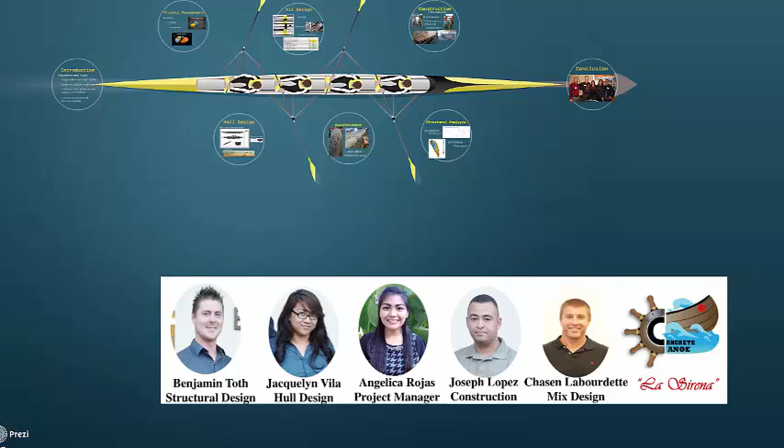Hello, my name is Angelica Rojas, and I was in charge of the project management for the concrete canoe team. Hello, my name is Jacquelyn Vila, and I was in charge of hull design. Hi, my name is Chasen Labourdette, and I'm in charge of the mix design of the concrete canoe. I'm Benjamin Toth, and I was responsible for structural analysis. Hi, I'm Joseph Lopez, and I was in charge of construction.

Our objectives and goals for this project include designing a hull that maximizes speed and stability, creating a mix design that is strong as well as lightweight. We have also taken on the challenge of designing the thinnest concrete canoe in San Diego State history, with a sidewall thickness of 0.2 inches. We are determined to crush our competition in the Pacific Southwest and compete in nationals. And now I would like to introduce Angelica, who will discuss the aspects of project management.

As a project manager, I was in charge of creating a schedule and setting strict deadlines. I monitored and oversaw each division to make sure everyone remained on track. I also organized weekly meetings where each member of the team gave an update of their progress and where we addressed how to overcome any conflicts that we encountered.

Another of my tasks was to contact companies and coordinate meetings with professional advisors who offered the team their guidance and support. I also contacted suppliers for sponsorship and discounts, which allowed us to reduce the cost of the project significantly. Another thing I was in charge of was ensuring access to labs and machines so that the team was able to perform necessary analysis that aided in the final design of a canoe that will perform exceptionally in the competition.

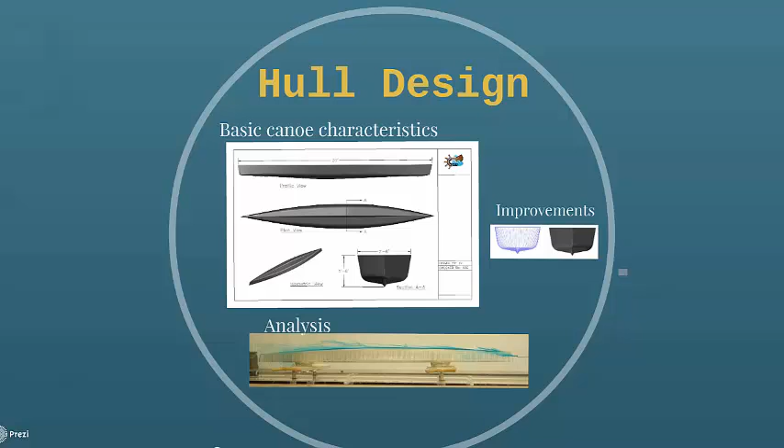A lot of research was done to determine the most optimal hull design for a concrete canoe. As a team, we focused on basic characteristics necessary for La Sirena to perform well during the race portion of the competition. The races require canoes to travel at high velocities in a straight path and be maneuverable. In watching the performance of canoes in past competitions, there were many areas that needed improvement.

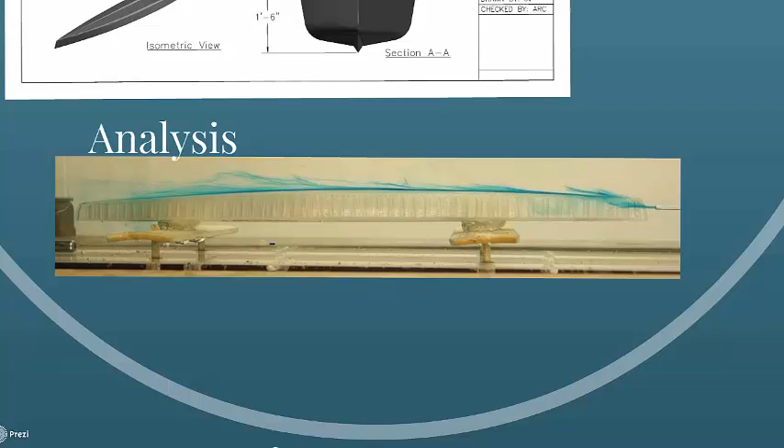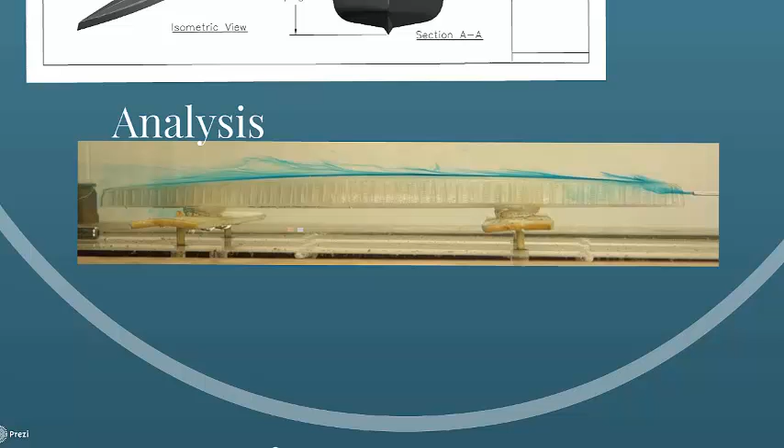Some canoes had a high rocker, which prevented an intended sharp entry line to break through the water surface and created difficulty in steering. For our analysis, we used a hydraulic channel to determine how various hull designs affect the flow. We 3D printed scaled models varying in lengths and widths, and a model consisting of a keel. Last year's hull was used as control. This analysis would give insight on the turbulent or laminar properties each hull would offer.

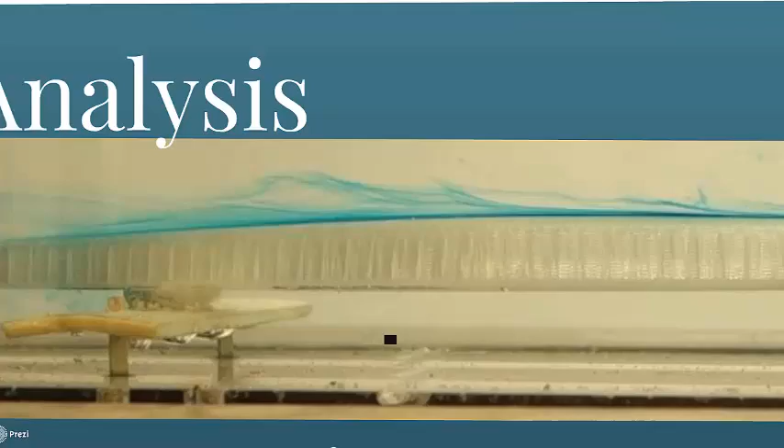For example, the wider model performed with low turbulence and created more of a laminar flow, whereas the more narrow model created more turbulence. From this observation, a wider model would be best. La Sirena is a foot shorter than El Luchador at 20 feet. A shorter hull will help with turns, and a keel was added to create a more streamlined flow and allow the paddlers to focus more on speed than on steering.

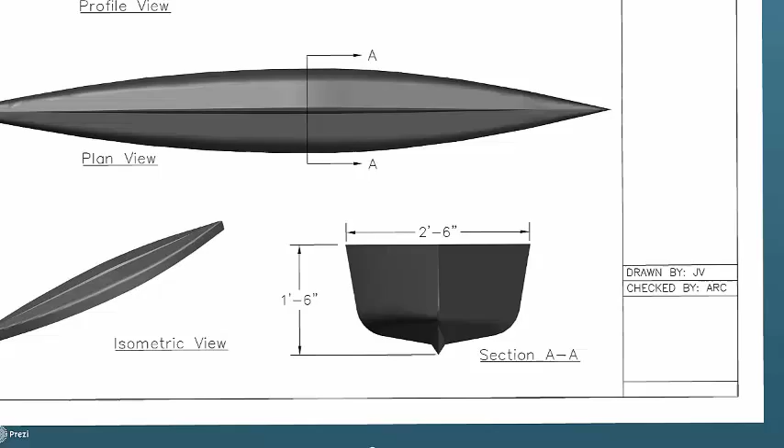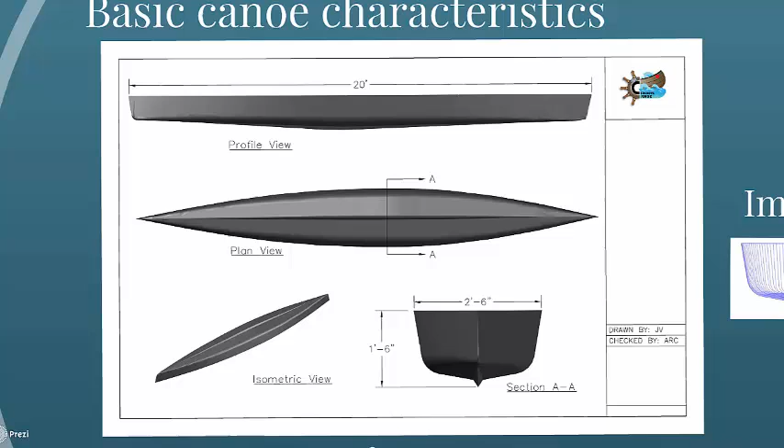The shallow V profile will aid in maneuverability and resist tipping. The widest point of the canoe of 30 inches is located a foot from the center to create a sharp entry line, and with a moderate rocker, create a lower bow height, improving the issue past canoes had of having too high of a rocker. And now Chasen, our expert in mix design.

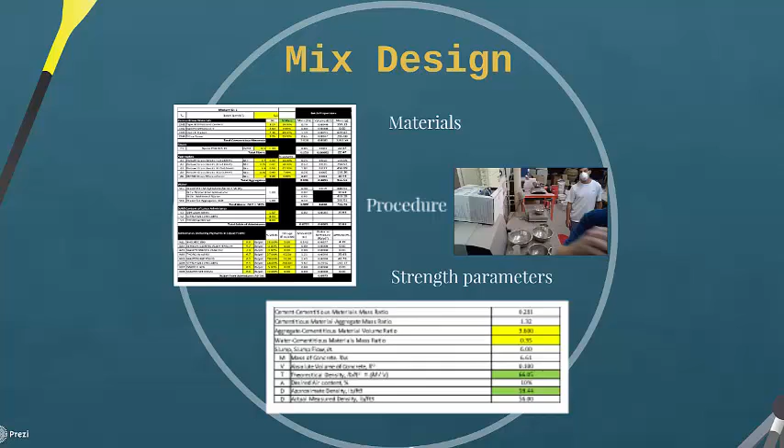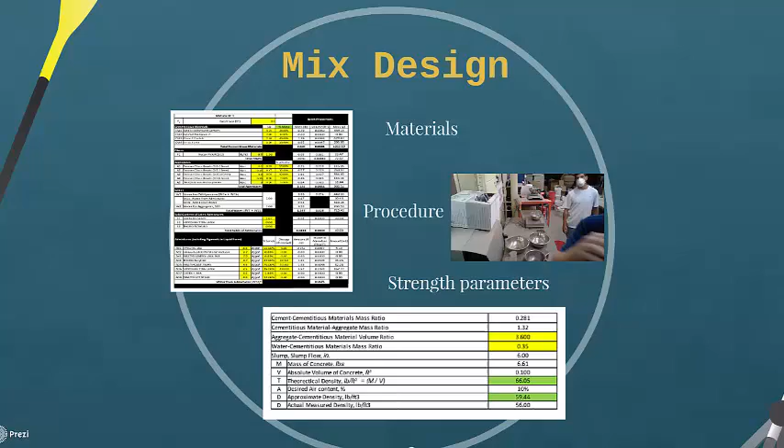The goal this year was not to redefine last year's concrete mix design, but refine all research, testing, and techniques of previous years. Cementitious materials used were Type 2/5 Portland cement, Class F fly ash, and silica fume. We chose to add more Class F fly ash than cement in order to increase compression strength and decrease permeability. Fibers used were PVA glass fibers, intended to increase tensile strength and reduce cracking.

Aggregates used were expanded glass beads ranging from 0.1 millimeters to 2 millimeters, and K20 glass microspheres used as a fine aggregate.

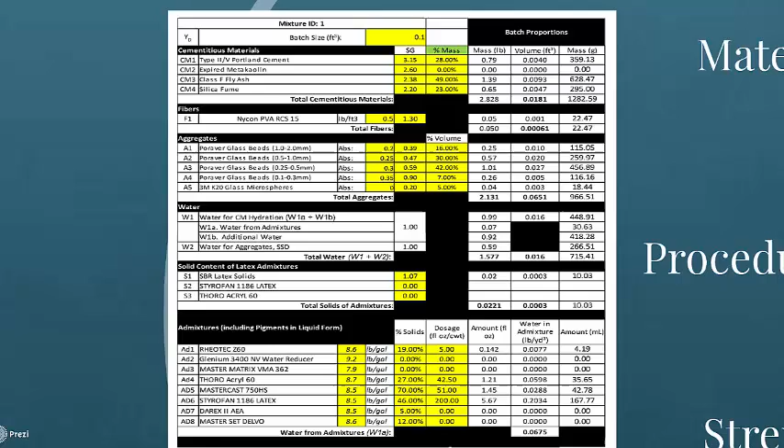Liquid admixtures included Rheotec Z60 for a workability retainer, Acryl 60 for bonding and modifying admixture, Mastercast 750 as a plasticizing admixture, Styrofan latex as a water reducer and polymer modifying admixture, Darex II for air entraining, and Masterset Delvo for hydration control admixture. The following video is an example of our mix procedures.

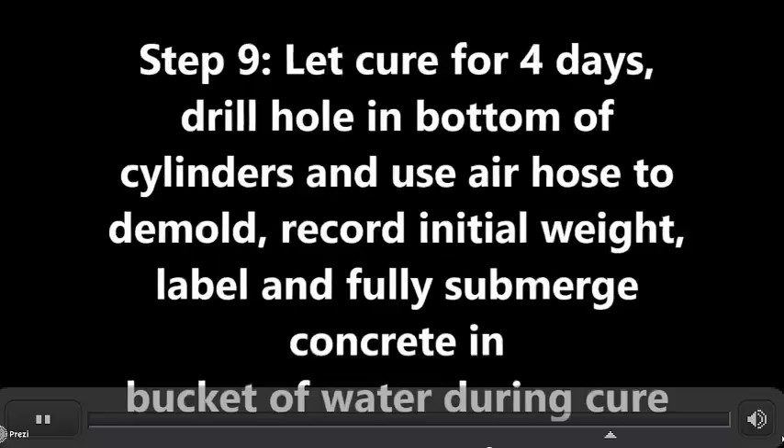Our final mix had a density of 56 pounds per cubic foot and a 28-day compressive strength of 1020 psi and a 21-day tensile strength of 92 psi with an air content of 10%. Over 15 trial mixes were made in order to adjust batch weights and ratios to the optimal amount.

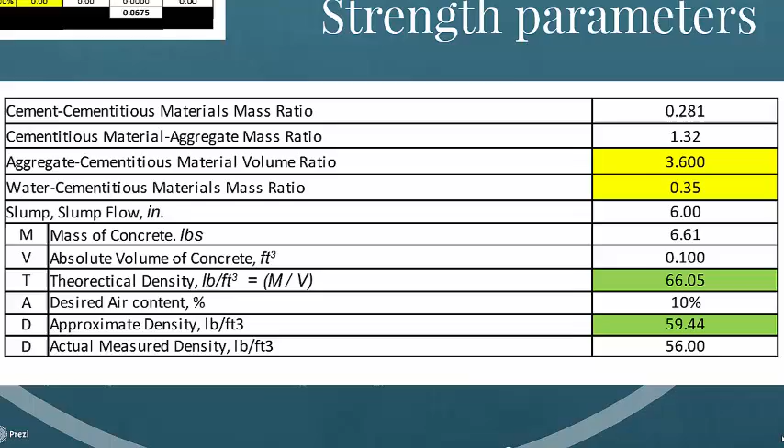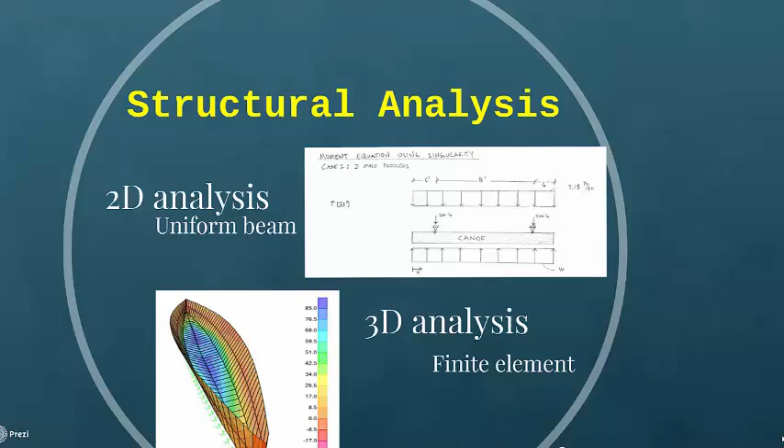Next is my analysis of structural design. The preliminary structural analysis of the concrete canoe was done in 2 dimensions, considering 3 separate load cases. The first and second load cases involved 2, then 4 paddlers sitting in the canoe whilst it's resting in water. By assuming that the concrete is a uniform beam and fixed at both ends, along with introducing the self-weight of the concrete and the weight of the paddlers, it is simply a matter of solving for equilibrium to obtain the buoyancy force pushing against the canoe.

Once all of the forces are known, by utilizing singularity functions, a moment equation can be written to solve for the maximum moment in the canoe, as well as its location. Using this maximum moment, the flexure formula is then used to develop the maximum tensile stress acting in the canoe at the location of maximum moment, which calculates to be 58 psi. The bottom of the canoe experiences the brunt of this tensile force.

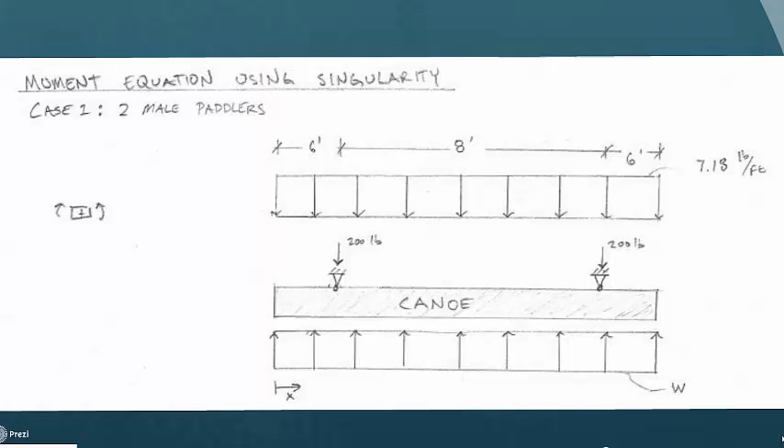A safety factor of 1.5 is used to account for unforeseen conditions and unexpected loads. This makes the ultimate tensile stress requirement 87 psi. Since the tensile capacity of the concrete was found to be 70 psi, a reinforcement option was found to be necessary. To get a better simulation of what stresses actually will form in the canoe, a 3-dimensional analysis was implemented.

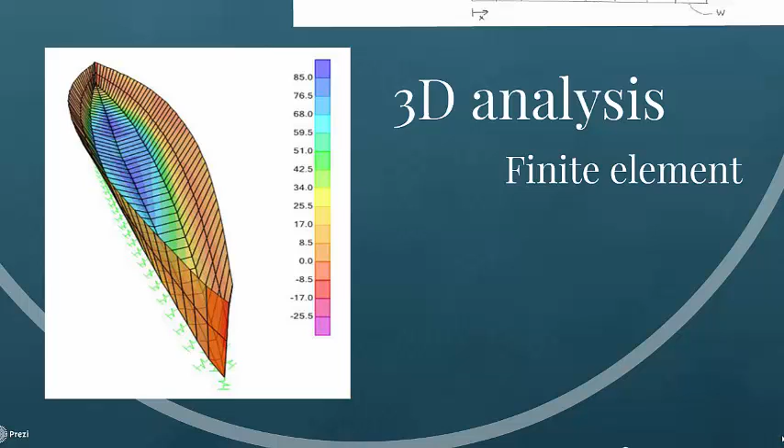Finite element analysis was used on a 3D model of La Sirena. Water was represented as springs at all nodes on the underside of the canoe. Also, the mass density of the concrete and the weight of the paddlers were entered into the computer program SAP2000 to complete the load case. The results were quite similar to that of the hand calculations, with a maximum tensile stress of 85 psi located under where the paddlers sit.

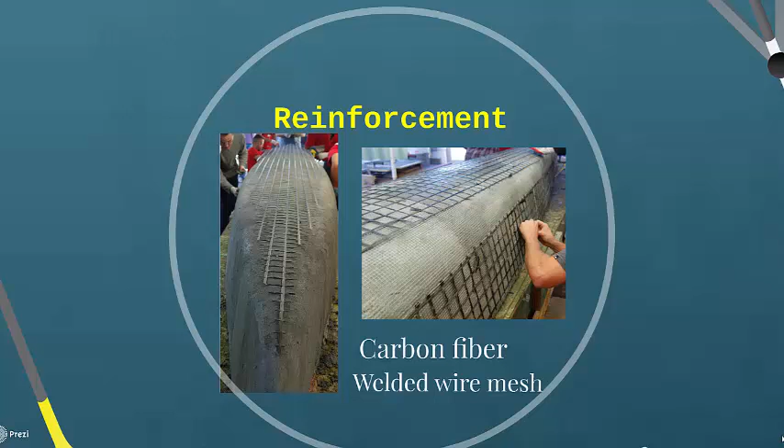The reinforcement options used were a carbon fiber mesh and a 23-gauge quarter-inch welded wire mesh. The carbon fiber is the strongest of the reinforcements implemented, with 290,000 psi of tensile strength. Since the carbon fiber is much too stiff to make the curve from the bottom of the canoe to the side, the welded wire mesh was used to reinforce the areas where the carbon fiber couldn't. The carbon fiber and welded wire mesh were placed in between 2 0.1-inch concrete layers. Checking the depth of the concrete was an integral part of keeping a uniform thickness of 0.2 inches.

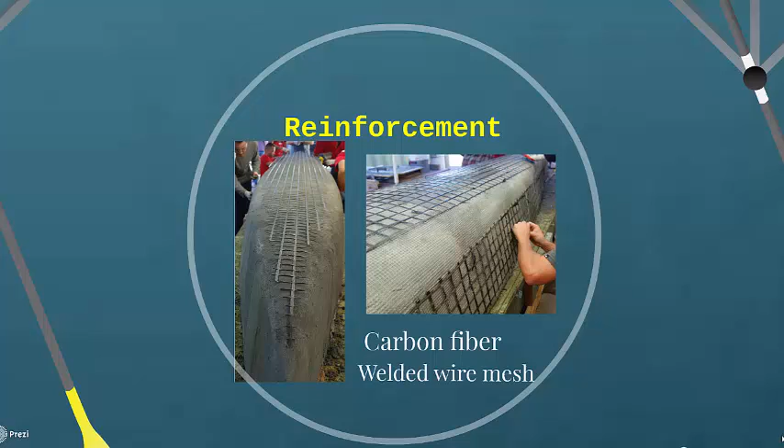Last, but certainly not least, Joe will explain the construction process. La Sirena required delicate procedures for her final appearance to be memorable. We started with specifically designed files from our hull designer, which were converted to readable files for the water jet to cut. Once the 4 3/4 inch thick styrofoam sections were cut, assembly was next. We spot sprayed foam the sections together and kept alignment with a true 20-foot 2x4. Next, we planed, sanded, and finish sanded the mold.

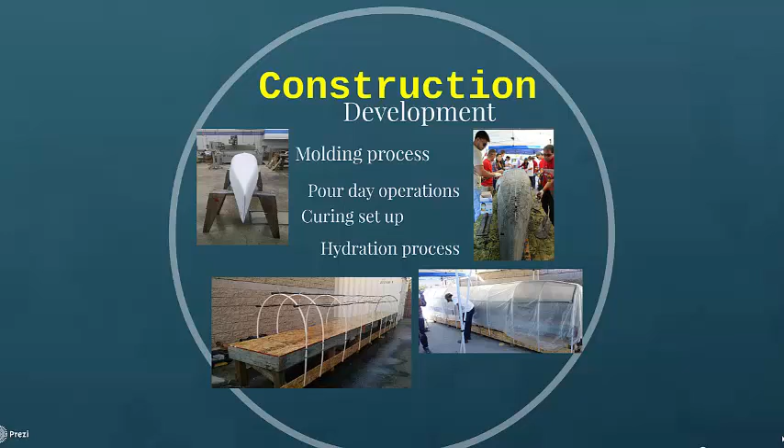Once the mold was complete, we covered it with one 8-ounce fiberglass layer. Overnight curing allowed us to cut the mold into 5 pieces for delivery and demolding. We decided to use carbon fiber mesh for the bottom and sides of the canoe. The radius was covered with 1/4 inch 23 gauge welded wire mesh. Pour day commenced with the help of 20 volunteers. We started by making the first layer 0.1 inch, installed reinforcement, then a second layer of 0.1 inch, molding a keel, then finished troweling. Irrigation hoops and plastic vapor barrier were installed to achieve maximum strength.

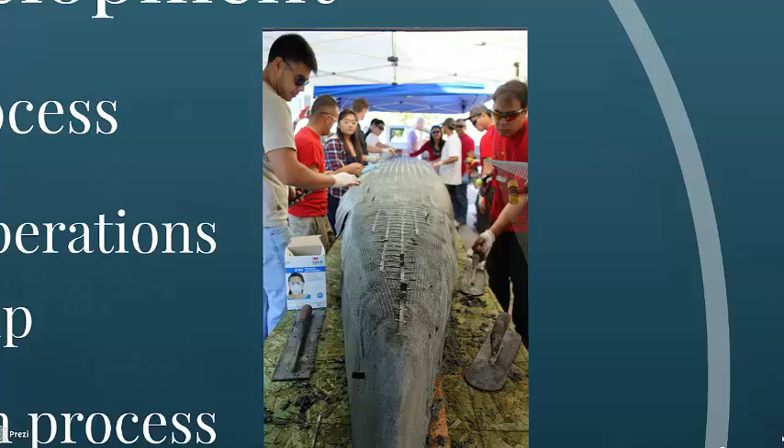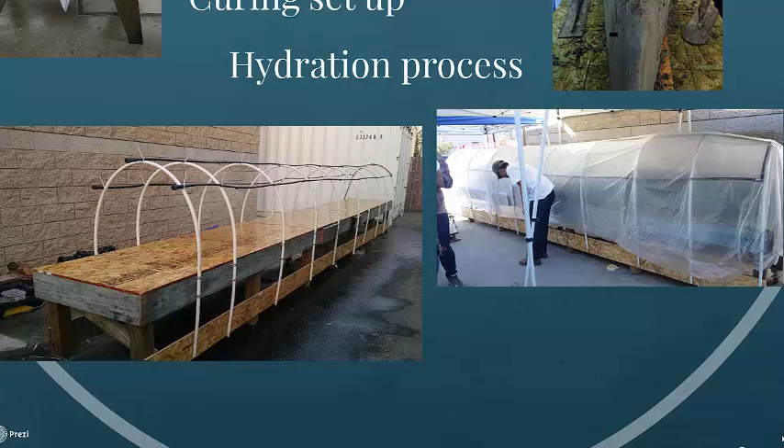Our curing table was a 3-rail system with misters. The curing process involved a 20 psi regulator and 40 360-degree misters that overlapped with each other 6 inches for a spraying capability of 22.5 feet. A timer was set on the hose bib and set to spray 4 times a day for 3 minutes each. The canoe was demolded 9 days later. Finished patching and light sanding achieved a finished canoe. Our challenges this year were to build a monolithic 0.2 inch thick canoe that was seaworthy.

In conclusion, it has been my pleasure to narrate and introduce the people responsible for designing and constructing a full-scale working model of our concrete canoe, La Sirena. We have covered the 3 fundamental processes of any civil engineering project: conception, design, and construction. We have utilized several major disciplines in civil engineering, being project management, fluid analysis, material engineering, structural analysis, and construction engineering.